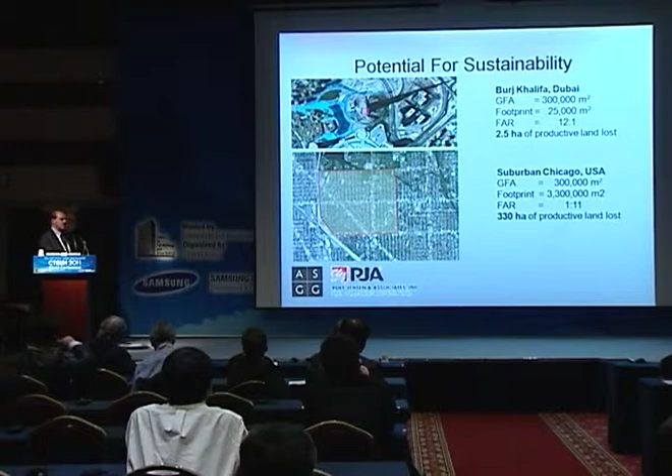There's also the potential for sustainability, and the council talks about that—there will be other presentations on sustainability. But if you compare the footprint of Burj Khalifa, which is on about 25,000 square meters with a floor area ratio of 12, with an overall loss of productive land of 2.5 hectares—if you went to suburban Chicago, or even within the city of Chicago itself, that footprint to house the same number of people would be 3.3 million square meters. It's a rate of development that, if you extrapolate it across the face of the earth, is just unsustainable.

So that's kind of the big picture. A little bit of the little picture is the differences between an urban tall building and a suburban single-family house.

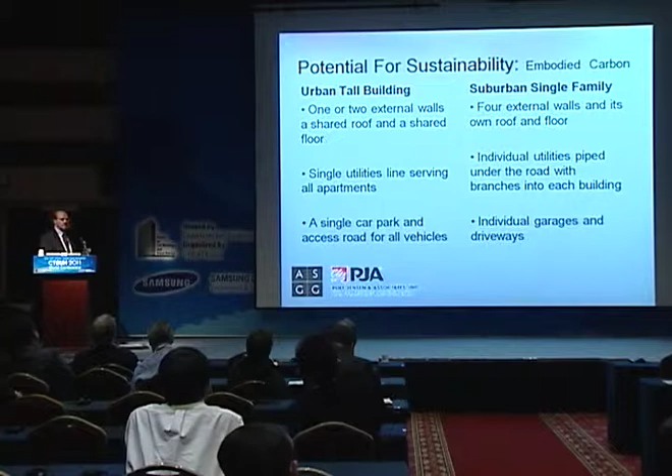There's a great deal of efficiency. Tall buildings themselves, maybe not on a square foot basis, may not be wonderfully efficient, but if you look at the bigger picture, the picture of urbanization, they are very sustainable and very efficient.

Why do you build tall? Also, you want to maximize your purchaser's value, and this gets into the economics, and we can't forget the economics. People will pay for superior views. They'll pay for proximity to the excitement and to other people. People will pay to be near other people.

When you're building tall, why do you build a super tall? This gets into the area of creating a landmark. There are many examples: Burj Khalifa, the John Hancock in Chicago. They also tend to be catalysts for economic development. These are like exclamation points around which a city can be built.

There's a phenomenon now of the last 10 or 20 years of building buildings that are kind of your entry into the world, and a building like the Petronas Towers is really a continuation of the example of the Empire State Building in New York. In the case of the Empire State Building, it was actually funded by General Motors. In the case of Petronas Towers, this is funded more or less by the government, putting Kuala Lumpur onto the map, if you will. And then, of course, there's the creation of icons.

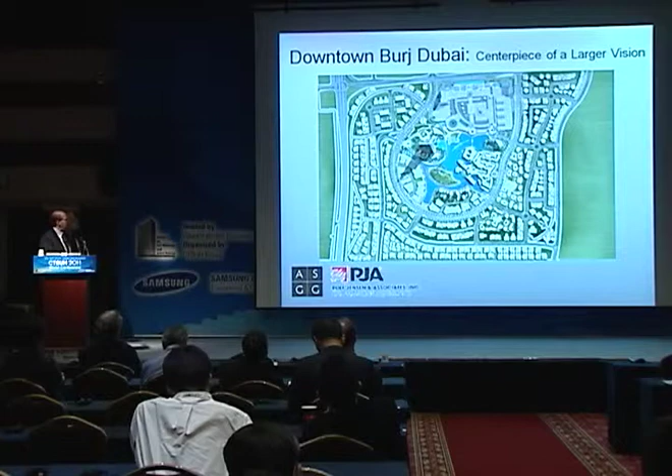Recent planning and architectural trends go again back to urbanization, the densification of urban development, placemaking, and value creation. All three of those are exhibited in the Burj Khalifa, the development around the Burj Khalifa. And you've seen this before - Ahmed and I both have the same source of slides.

But the fact is that Burj Khalifa is really the center point of land that had really no value until it was there, and so it created a massive amount of value. We know Dubai has had its troubles, but the area around Burj Khalifa has been kind of a success story. We know that the projects closer to Burj Khalifa with a view of it have a much higher value than the projects further away that don't have a view.

Great. Thank you, Peter. Good afternoon.

Talk a little bit about some of the trends and factors we've seen both in Burj Khalifa and more recently with respect to the fire and life safety aspects of super tall buildings. One of those is that these are world-class structures. No matter where we build these facilities, they're not only competing in a local marketplace, but they're also competing globally. They're competing with buildings all over the world for tenants, competing for investors, and there's an expectation that these buildings have a level of safety consistent with world-class buildings throughout the world.

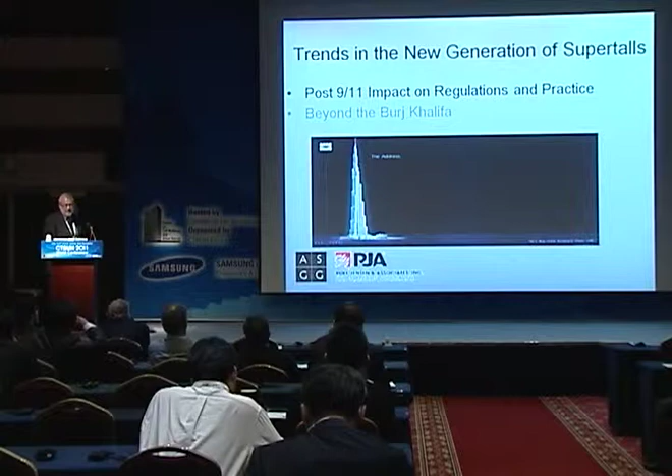Trends for the new generation - talking about some of the technical aspects of this, both with Burj Khalifa and beyond. We're now designing for non-fire related events, working with our security consultants, architects, structural engineers, and the whole team to look at different scenarios and how that might affect the building, and how we need to respond to various emergency situations. Those can be anything from a building fire, a terrorism event, extreme events like that, or even weather-related issues.

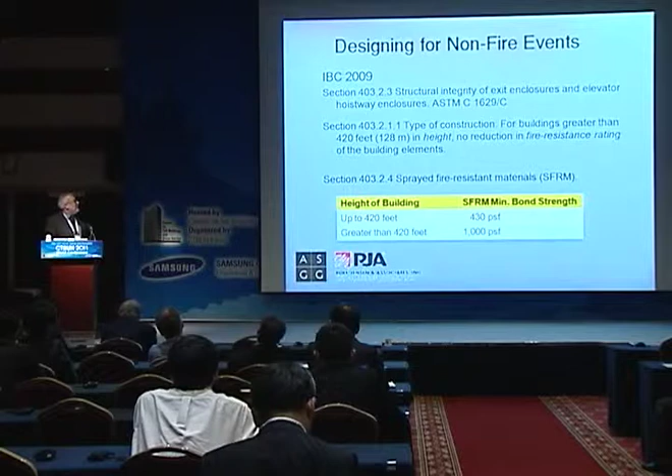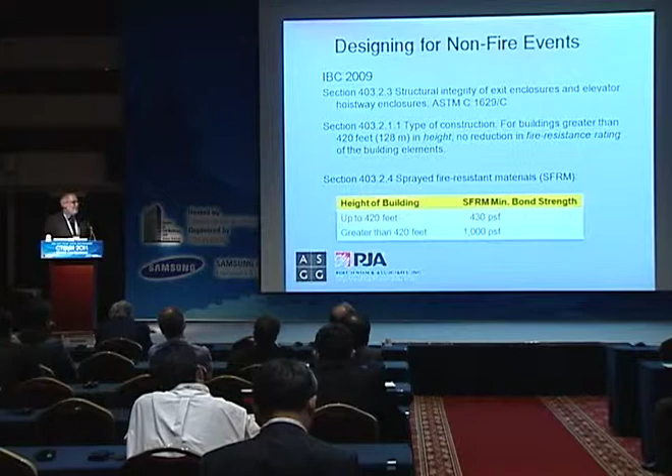Some of the design features and outcomes of this: IBC now has specific requirements, a result of the NIST report on the 9/11 events. There are specific requirements now related to the structural integrity of exit enclosures and elevator hoistways, also related to spray fireproofing and increased fire resistance for super tall structures.

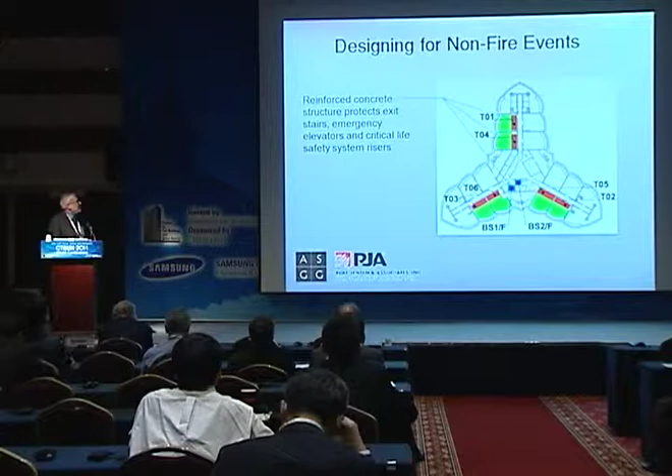One of the things we've seen commonly, and this was incorporated on Burj Khalifa, is the stairs, the emergency elevators, and all of the life safety system risers embedded within the concrete structure. So it's protected, embedded within that hardened structural area.

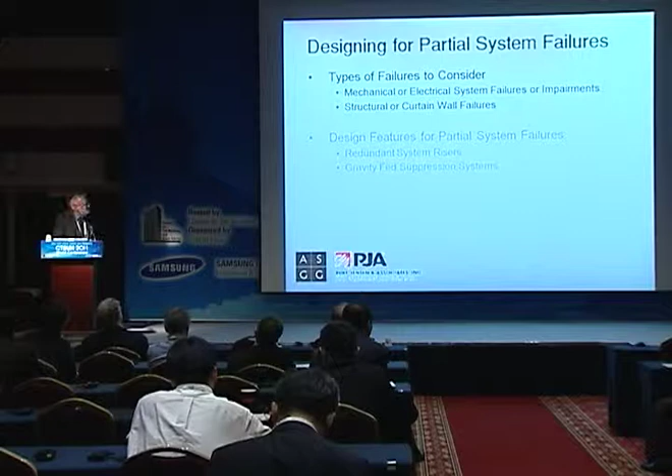The other thing we've seen as a result of 9/11 is designing for partial building system failures. This is where we get more redundancy and robustness of systems. I'll show you a couple examples. For instance, emergency power systems with redundant generators and redundant risers, so if there's a partial or single failure, it doesn't affect the overall system.

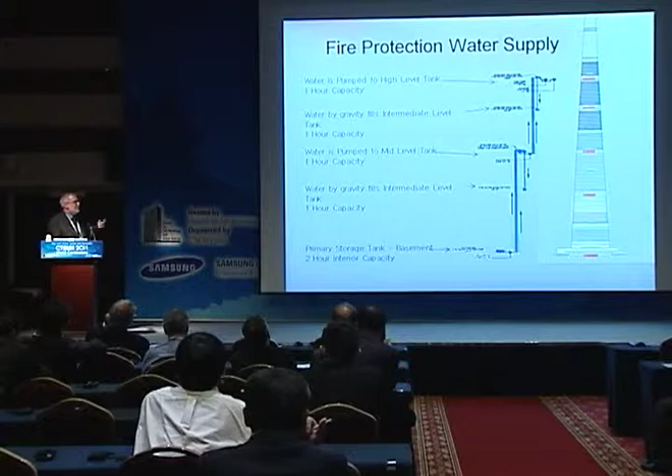Similarly with fire protection water supply, this Burj Khalifa example has a series of tanks at various levels. We can pump water up, and water is also supplied by gravity into the sprinkler and standpipe systems, so there's redundancy. If there's a fire up here, we can pump water to replenish the tank; if there's an issue in this zone, we have water above. So there's redundancy both upward and downward.

One of the key things from Burj Khalifa and most of our projects now is designing for full building evacuation. It's not only for a terrorist event, but something as simple as losing power or air conditioning in Dubai during summertime. An extended loss of air conditioning would require evacuating the entire building.

So we've incorporated areas of refuge, which have become a de facto standard on most of our projects. These are generally every 20 to 30 floors, a contained area allowing people to evacuate down to a safe area where they can await further instruction, connected to the stairs so they can continue down, use evacuation elevators, or stay in place until further instruction.

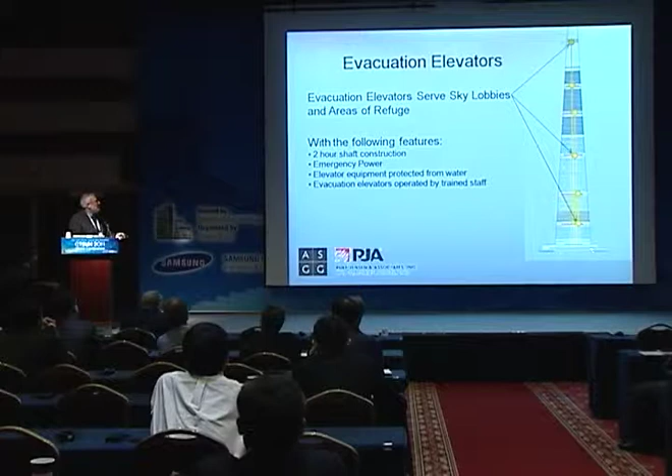The other feature incorporated in most of our projects since Burj Khalifa is evacuation elevators. We recognize that evacuating a super tall building using only stairs can take 3 to 4 plus hours, so we want to get people out more efficiently and effectively. Typically we utilize the shuttle elevators for this purpose, enclosed in standard 2-hour shafts, all provided with emergency power.

The elevator equipment and hoistways are protected from water, and we generally recommend this be operated by trained staff—that the elevators actually be run by trained building personnel, going either to the sky lobbies or refuge floors depending on the scenario, evacuating people that way.

Some operational aspects: one of the keys to very complex large buildings like this is not only designing and building them, but having adequate staffing, training, and maintenance of the fire protection systems. It's a very key issue. Often we build projects in areas where building maintenance isn't a high priority, but on supertall building projects, it's a very necessary part.

The other aspect is developing crisis management plans. We worked on the Burj Khalifa crisis management plan, defining all the different types of threats and events that can occur within the building—whether building system, human-related, or weather-related—and developing crisis levels for those events, along with response scenarios for building staff to respond, and finally training the building staff in how to actually carry out those emergency response plans.